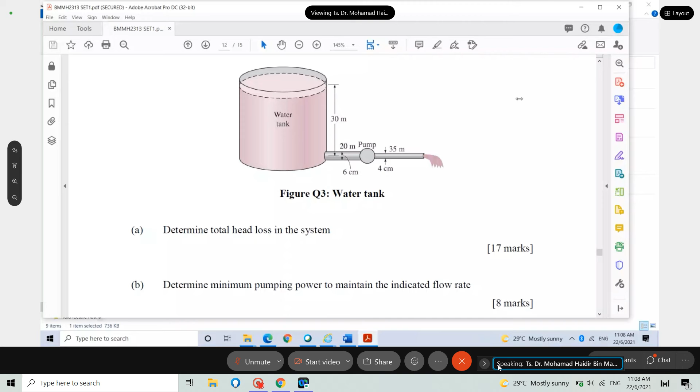Okay. So let's go to the past year question. Share screen. Okay, so I'm sharing with you the past year question. We have solved question 2 previously, but question 3, the solution is a bit long. You can see that the marks are really big, it is 17 marks. The solution is a bit long, but it is easy to follow if you can understand internal flow.

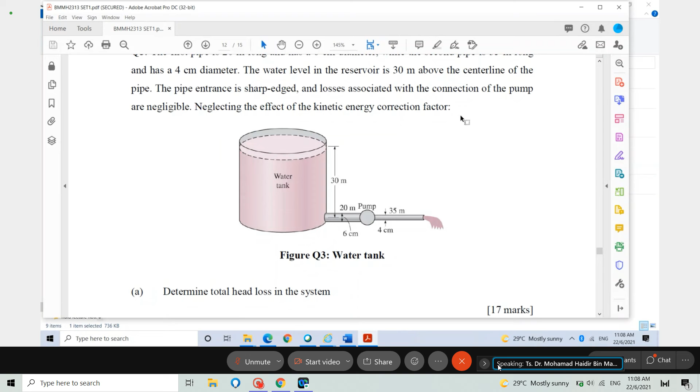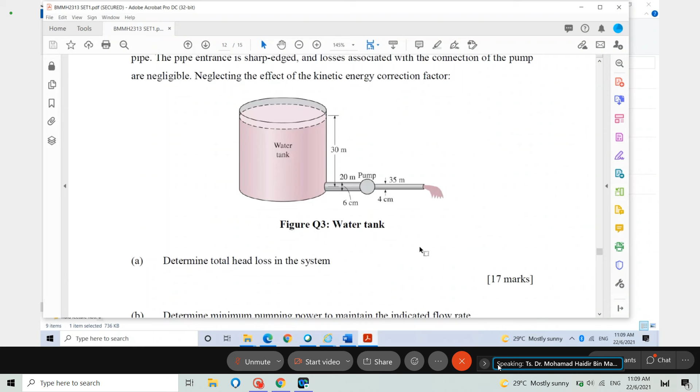So for this question, if we want to recap, you just need to know the type of flow. Is it laminar? Is it turbulent? By knowing the type of flow, you can solve for the friction factor. And after that, you can figure out the number for the minor losses. Then you can solve this question. It's a bit long, much calculation, but it's really direct. Okay, we go to question 4.

Question 4. Light oil at 20 degrees C flows over a 4.5 meter long flat plate with a free... Oh, sorry, I forgot to bring my pen. Just a while.

Light oil at 20 degrees C flows over a 4.5 meter long plate with a free stream velocity of 2 meter per second. Determine the total drag force per unit width of the plate. The density and kinematic viscosity of the oil at 20 degrees C: rho is 888.1 kilogram per meter cube, and kinematic viscosity is 9.429 times 10 power of negative 4 meter square per second. So the question is to get the total drag force. It's a simple question and simple solution.

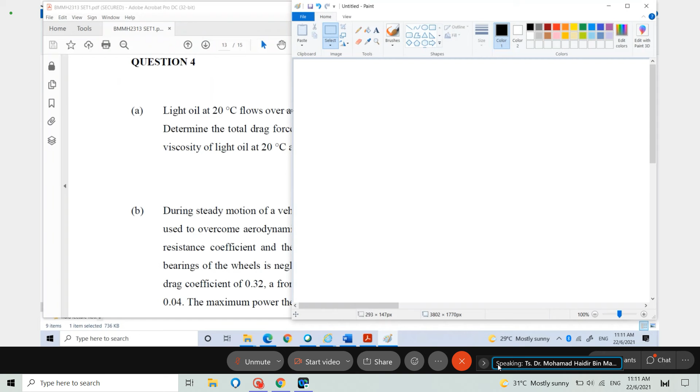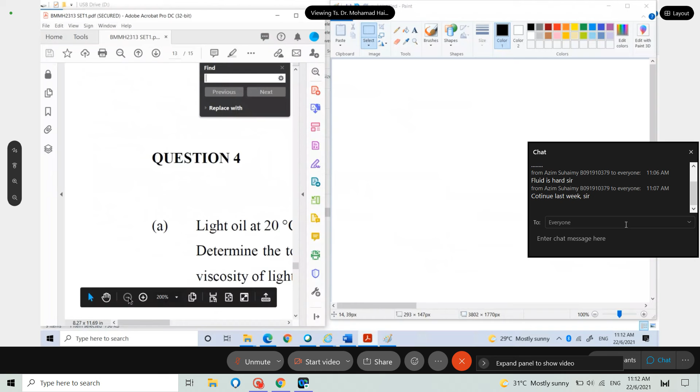Okay. So as last week, we make it side by side, so you can see the question and how to solve it. Hope you still can see my screen, at least you can read the question. Okay, how to zoom view... Where's the zoom gone? Okay, yeah. 150, 125, 100. I think 80 should be okay.

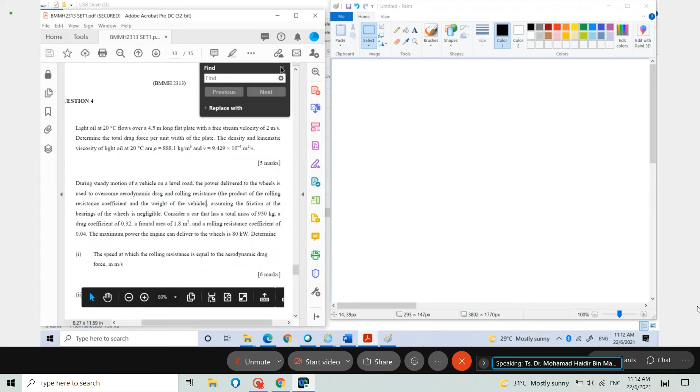So we are solving 4A. The equation that we are going to use, I hope you still can remember: F is equal to CD A rho V square over 2. For this question you need to get the force. You are given the plate area, the density, and the velocity, but you don't know the CD. How to get the CD for this type of question?

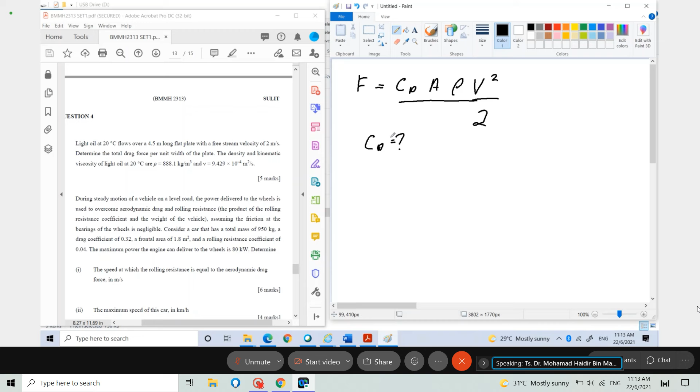To solve this, refer to my slide on external flow. For this type of question, you need to know first the Reynolds number, because you need to determine the type of flow. Is it laminar or turbulent? If it is laminar, below 5 times 10 power 5, CF is 1.33 over Reynolds number power of 1 over 2. If it is turbulent, CF is equal to 0.074 over Reynolds number power 1 over 5. So what you need to do now is to get the Reynolds number.

Reynolds number is equal to rho VD over mu, or VD over nu. But in external flow, it is rho VL over mu or VL over nu, where nu is the kinematic viscosity. Since the kinematic viscosity is given here, you can determine the Reynolds number. V is 2 meter per second, L is 4.5 meter, and nu is 9.429 times 10 power of negative 4. Okay, can anybody count for me?

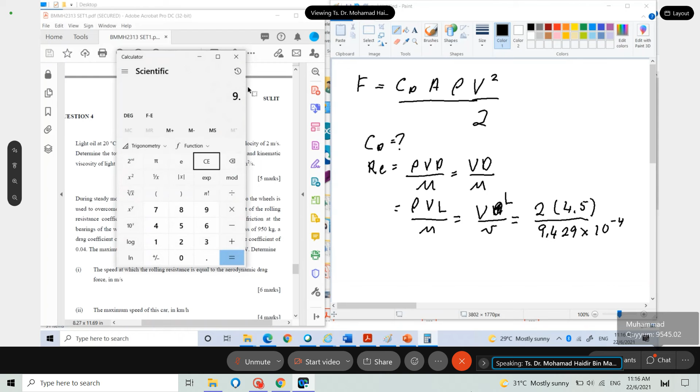Can anybody please calculate? 9 divided by 9.429 exponent negative 4. I don't know how to use this... Okay, can anybody please count for me? 9545. So it's equal to 9545.

So the equation we're going to use is 1.33 over Reynolds number power of 1 over 2. So let's go back. We know this is laminar, so when it is laminar, CF is equal to 1.33 over Reynolds number power of 1 over 2. So it is 1.33 divided by 9545 power of 1 over 2. Then you get the answer.

Using the answer you get here, just fill in the equation for the drag. FD equal to CF, okay this is the answer, and then A, area, rho V square over 2.

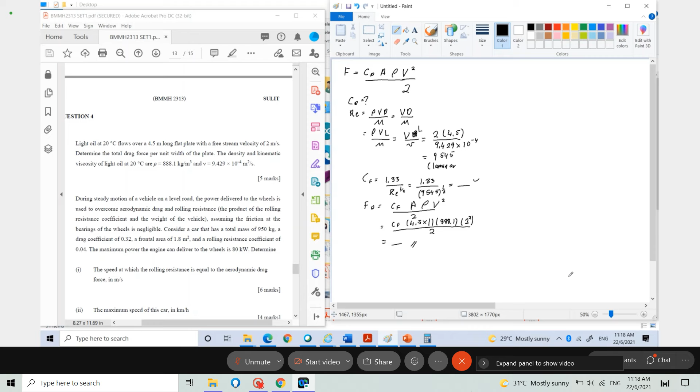Okay, let's go to question 4, question B. During steady motion of a vehicle on a level road, the power delivered to the wheel is used to overcome the aerodynamic drag and rolling resistance, which is the product of the rolling resistance coefficient and weight of the vehicle. Assuming a car has a total mass of 950 kg, a drag coefficient of 0.32, a frontal area of 1.8 meter square, and a rolling resistance coefficient of 0.04. The maximum power the engine can deliver to the wheel is 80 kilowatts. Determine first the speed at which the rolling resistance is equal to the aerodynamic drag force, and second, the maximum speed of the car.

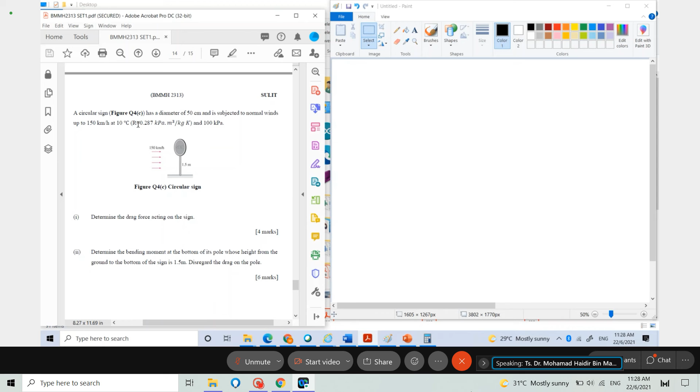R equal to 0.287 kilopascal meter cube per kilogram Kelvin and 100 kilopascal. So you know P, you know the temperature, you know the R. P equal to rho RT, so to solve this question is determine the drag force acting on the sign.

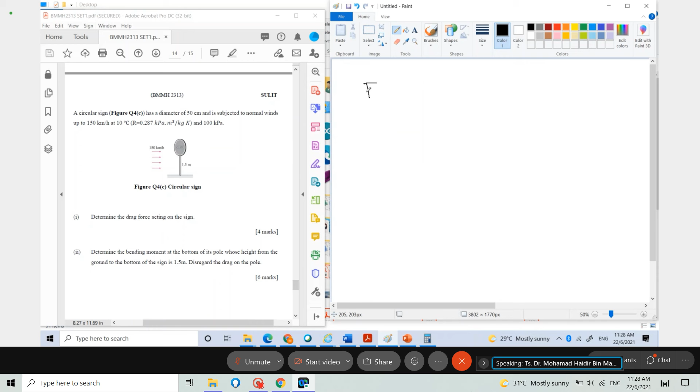Okay, for this question, the equation is still same. F D equal to CD times A times density times V square over 2. Then for CD, how to get the CD?

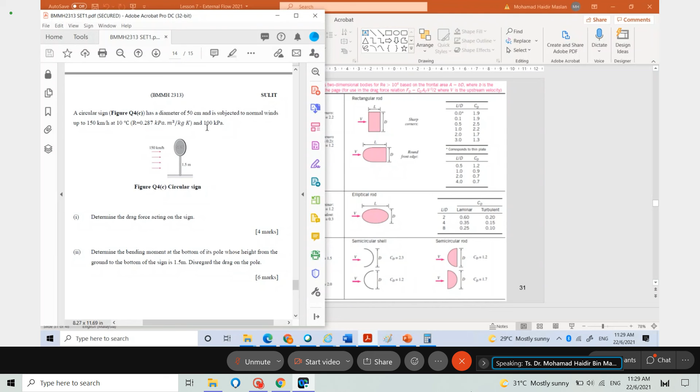So what you need to do is go to the slide again, go for this type. This table is really important for you, so you need to find which one is similar. The case is a circular disc and directly normal, the wind is normal to the circular sign. So find it from here.

It is a square rod, rectangle rod. This is circular, but it is a rod. So it's totally not elliptical rod, not triangular, semicircular shell, sorry, not that case.

But this looks like this case: thin circular disc. A is equal to pi d squared over 4, and the velocity acting to the surface. So we can choose this figure. For this figure, CD equal to 1.1.

Okay, go back to the question. Now you know that from the table, CD is equal to 1.1. So just solve the question.

CD equal to 1.1, A equal to pi d square over 4, or pi r square, up to you, whichever one you prefer. Then density, just take the density, and then for the velocity...

The velocity is 150 kilometer per hour. V equal to 150 kilometer per hour. So you need to change it into meter per second. 1 hour equal to 3,600 second. 1 kilometer is equal to 1,000 meter.

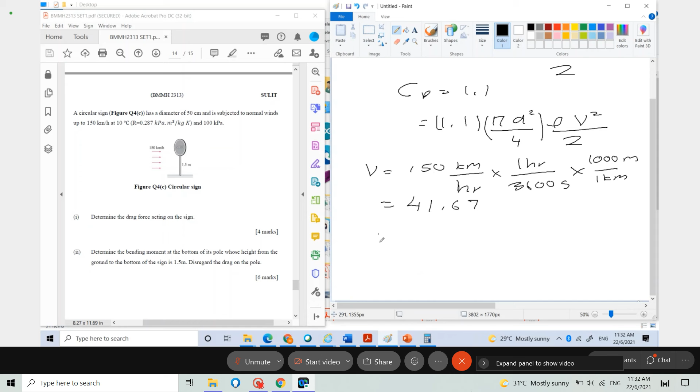So you know that this is the sign. It's a bit hard to make a straight line using this. This is the pole, and this is the sign. Sorry, I cannot write properly. You already know, you already calculated the force, and you got the force here.

1.5 meter is from the ground to the bottom of the sign. So the force will act at the center, so you got extra distance here you need to calculate. It's equal to the radius of the circular disc. The diameter is 50 centimeter, so the radius is 0.25 meter. So you know the D now.

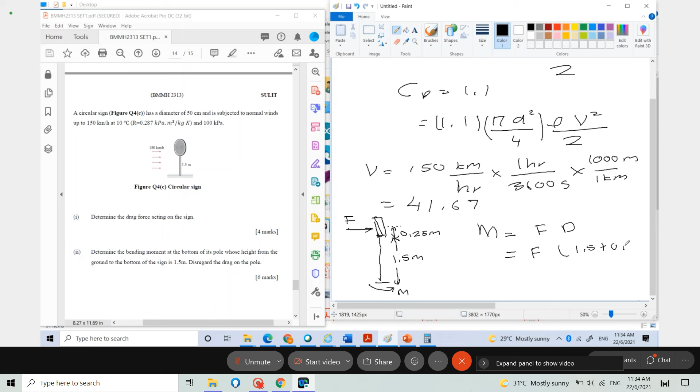What you need to calculate is the moment. So what is the moment here? Moment is equal to F times D. Get F from the value you got before, and D is 1.5 plus 0.25. So you can solve this question.

Okay. I hope you can understand. Okay, finished skipping this question. Okay, let's go to the final question. Okay, you can understand? Okay. Thank you. Okay. Oh, thank you.

Okay, we go to final question. Question 5. Water is flowing through two identical rectangular sections with unfinished concrete surface. The width and the height of the flow section is 3 meter times 3 meter.

So we go to the final slide, open channel flow. You know that this question is about a rectangular channel, unfinished concrete, and the width of the channel and the flow section is 3 meter times 3 meter. Determine the flow rate of the water if the bottom slope is 0.002.

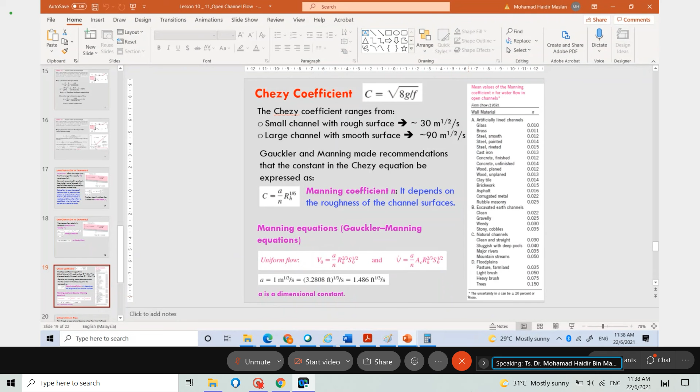You know A equal to 1, and you can get N. The rectangular channel has unfinished concrete. When you know this is unfinished concrete, go to the slide again and find the channel with unfinished concrete. What is unfinished concrete? This is concrete unfinished, so the value is 0.014.

0.014, this is from the slide, for N hash. Okay, AC. How to get the AC? AC is the area of the channel, so AC is 3 times 3.

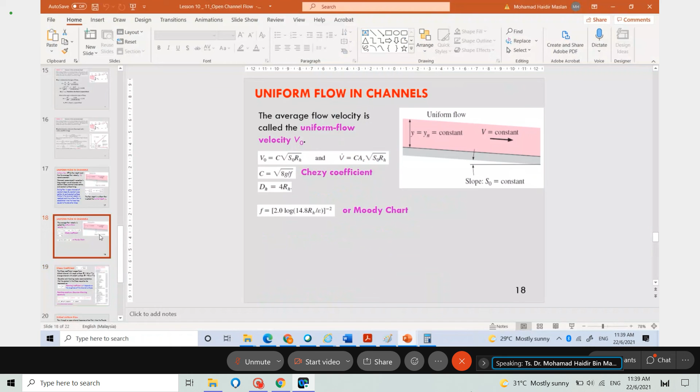And for R h, how to get R h? One more is the wetted perimeter. Wetted perimeter is 3 plus 3 plus 3. I hope you still remember from the slide, which I told you, to get the Rh. Rh is equal to AC over P, where AC is the area and P is the wetted perimeter. The perimeter is wetted by water.

So Rh is equal to... P. So Rh is equal to 1. SO is equal to 0.002, given from the question. Just put all this information into the equation and you can solve the question, for part one.

Is it okay? Finish part one, we go to part two. Now the flow rate of the water.

Sorry, this one is two identical rectangular channels. So to solve this question, V dot is equal to 2 times V dot for one channel.

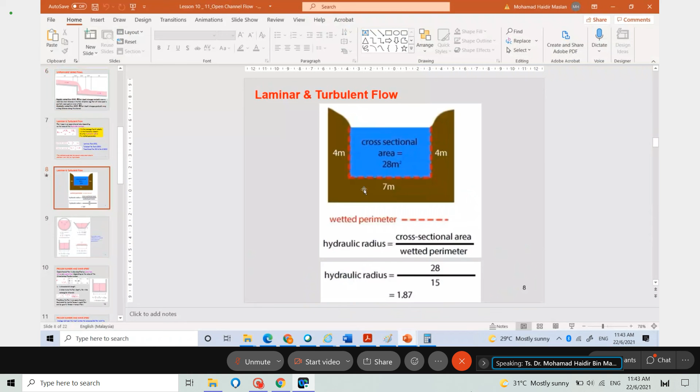Critical depth. So how to determine the critical depth? Just go to the slide and find the equation for YC, the critical depth. So where is it? YC is equal to V dot over G, AC... So for question one, YC, Y critical, is equal to V dot divided by GA. Is it GA only? YC, G, B square.

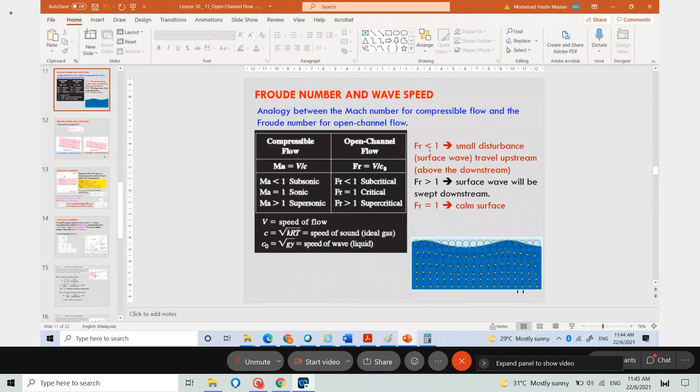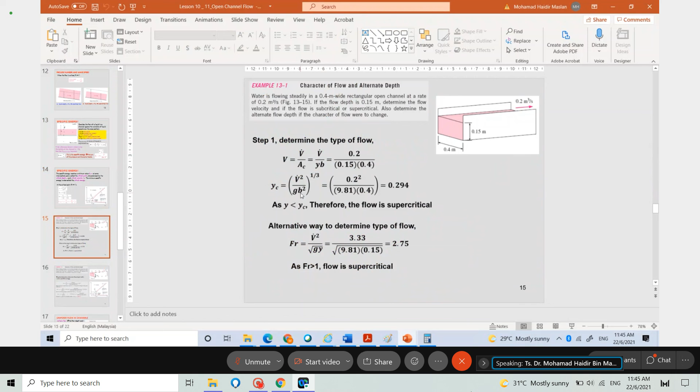V equal to V dot over A, and then YC equal to V dot square over GB square, power of 1 over 3. Do I make a mistake here? Okay, you can just use this equation: V dot divided by GB square, power of 1 over 3. I think that's much easier, I forgot the equation already. V dot square over GB square, power of 1 over 3.

Okay, just include all the information. V dot is 12 meter cube per second, divided by G which is 9.81, and B, rectangular channel at depth of 0.55, 6 meter wide, so 6 square, power of 1 over 3, and you will get the answer.

For question 2, whether the flow is subcritical or supercritical. How to compare? If Y is lower than YC, and if Y is greater than YC, which one is supercritical, which one is subcritical? This one is supercritical, this one is subcritical.

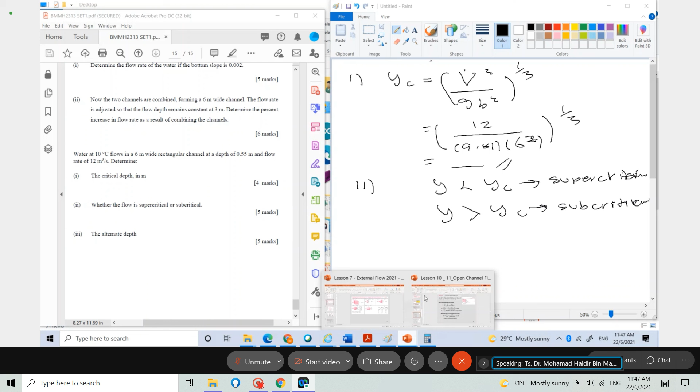And then lastly, the alternate depth. For this question, go to my slide, where is it? This one, for step 2, determine the alternate flow depth with the same specific energy. So find the ES, the specific energy. ES equal to Y plus V dot square over 2GB square Y1 square.

Put all the information in, and you get the value for ES. And then what you need to do is find ES2, because you have already found the specific energy, but what you need now is Y2, the alternate depth. So use this equation, and either you calculate by yourself by manipulating this equation, or what you need to do is just Google for an equation solver on the internet, put in the information, and you will get the alternate depth. Okay, that's all.

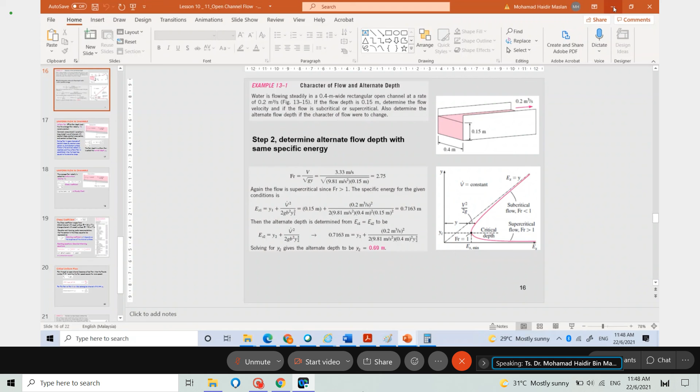Okay, we have finished the previous year questions. I hope you gain confidence for your exam this semester. The questions, I think, are normal. In university, you cannot expect the questions to change so much. Okay, the questions are different, totally different, but the trend is there. You can get the trend. The trend is always the same.

So try to solve several previous year questions, and one more is from the notes. The examples that I have given are enough for you to answer the questions. But please don't read the solution. Try to understand it. Okay, so that's all. And then just one more: you have done almost everything except the final exam.

But one more is you also need to do the quiz. For this week, I will give you a quiz online. There are 5 questions. I will give you 5 different quizzes, so you can click and solve them one by one, from quiz 1 until quiz 5. One quiz is just one question on a specific topic. I will let you know the topic.